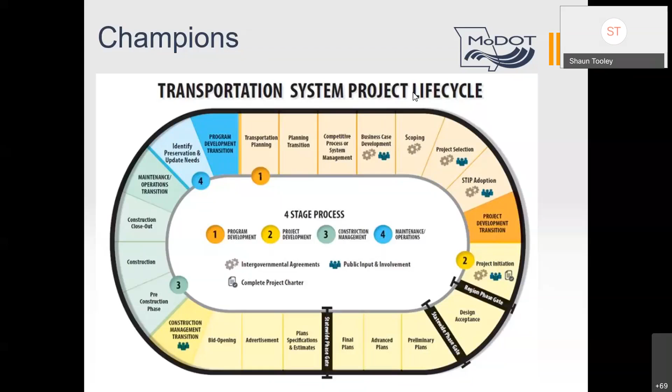In the past, two St. Louis District employees were internal champions for active transportation. Some of you may even know them by name: one, Paul Wojciechowski, is a consultant who has conducted many active transportation studies in the state of Missouri. And the other is Larry Welty, who now works for St. Louis County and has helped launch the Bike Walk Action Plan for St. Louis County that is currently underway. Even though they are former MoDOT employees, their passion for active transportation has continued.

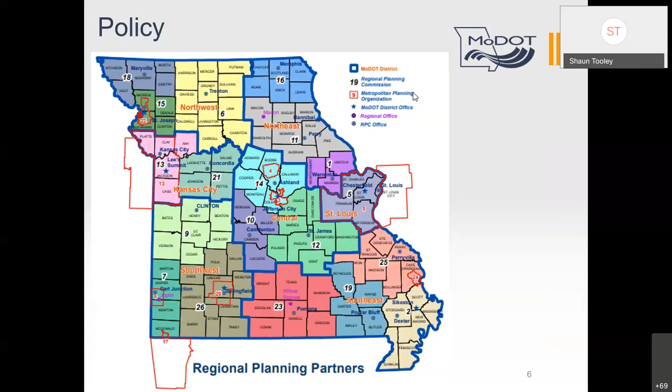Policy: displayed on this slide are our transportation planning partners, metropolitan planning organizations (MPOs) and regional planning commissions (RPCs), who work with MoDOT to develop and apply policy to the state. At the federal level, there have been very influential transportation acts, including the Federal Aid Highway Act of 1956, for which many of us are familiar, which resulted in 41,000 miles of interstate highways. The other, and related to active transportation, is the Intermodal Surface Transportation Efficiency Act of 1991, which emphasized being inclusive of other modes. This act, nicknamed ISTEA, set goals for reducing bicycle and pedestrian fatalities and injuries, and doubling their share of total trip making. These two pieces of legislation have shaped where MoDOT is today.

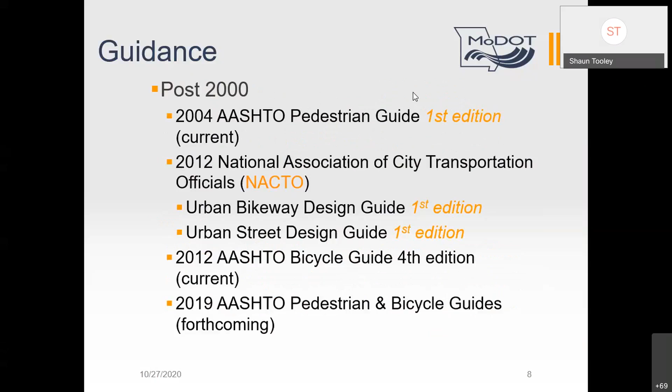On the next slide, you'll note guidance that is post-2000, including the National Association of City Transportation Officials, or NACTO, guide in 2012.

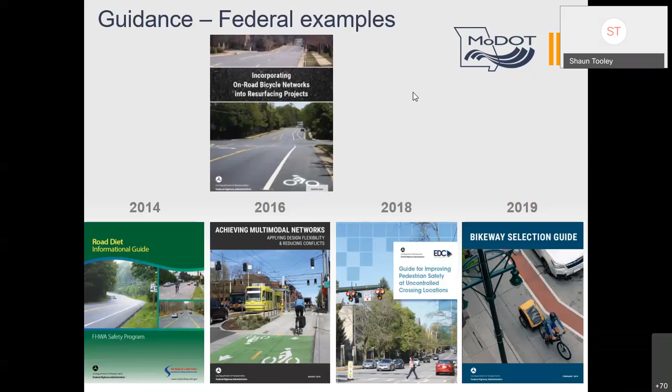On the third slide for guidance, you'll note that quite a bit has happened since NACTO published their guide in 2012, in that the Federal Highway Administration has published additional resources covering topics such as incorporating bike facilities into routine resurfacing projects, achieving multimodal networks, improving pedestrian safety at uncontrolled crossing locations such as mid-block crossings, and most recently, the Bikeway Selection Guide, which solidifies the concept of different types of bicyclists associated with the level of stress rated by bike facility type. As you may note from the years listed, much change has happened since 2012.

Demonstration projects: to put this guidance into practice, Federal Highway has funded example projects with programs many of us are familiar with, such as the Safe Transportation for Every Pedestrian (STEP) and Every Day Counts (EDC). These projects provide states with examples to replicate and have resulted in much of the change to guidance and supporting information published since 2012. More on examples of STEP later in this presentation.

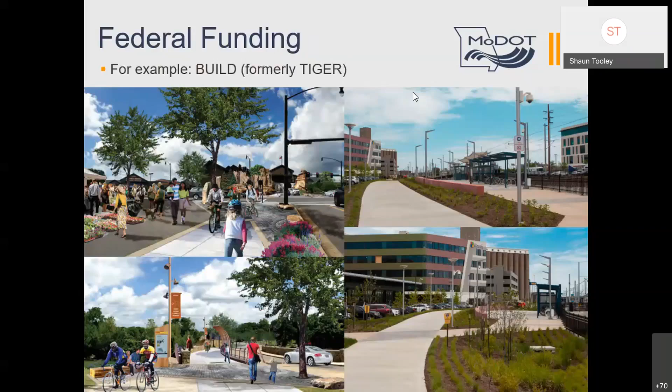On the right, in 2014, a BUILD grant was awarded for the Cortex Metrolink station and first segment of the now renamed Brickline Greenway in central St. Louis City. In 2020, MoDOT applied for an INFRA grant for I-270 in northern St. Louis County, which included extending shared use paths along the outer road by 3 miles to connect to the North Riverfront Trail with Great Rivers Greenway.

Although the grant was not awarded, the inclusion of bicycle and pedestrian facilities demonstrates the growing importance of active transportation to the Missouri Department of Transportation.

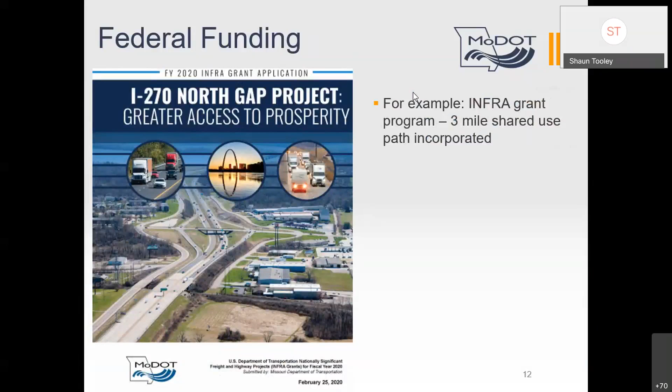Implementation: MPOs and RPCs, as referenced earlier, are partners with MoDOT in transportation planning decisions, and they commit their resources to active transportation. Through vision setting and planning activities, such as the Regional Long-Range Transportation Plan, policies, and area-specific plans, MPOs and RPCs can influence the inclusion of active transportation projects on the MoDOT system in their respective areas. There is more on this later in the section on MoDOT as a stakeholder.

However, there are challenges. MoDOT has encountered challenges to bicycle and pedestrian inclusion, such as what standard to apply. As many of you may know, MoDOT follows AASHTO guidance, whereas cities and counties are more flexible when using NACTO guidance. Other examples of influencing factors include right-of-way and environmental impacts, among many others. These challenges result in trade-offs and balancing priorities and commitments—and I can't emphasize this part enough, again, about trade-offs and balancing those priorities and commitments.

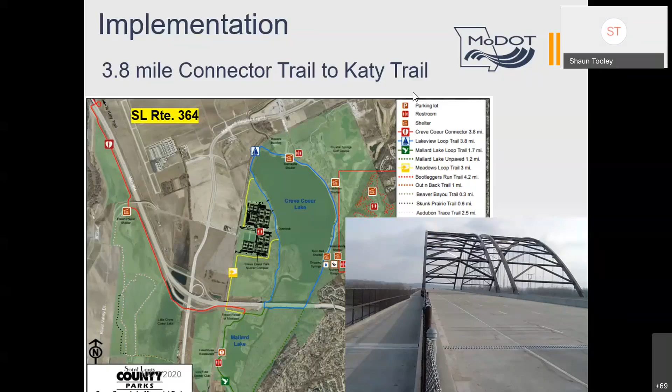In summary, for background information, what influences MoDOT's roles and decisions in active transportation is related directly to its responsibilities and focus, the role of its leaders, the pursuit by internal champions, the expectations set by policies, the flexibility of guidance, learning from demonstration projects, how much funding is available, addressing project-specific challenges, and working towards implementation, especially in partnership with other governments.

Next, I will share with you MoDOT as a builder. And this is fun because we get to see pictures.

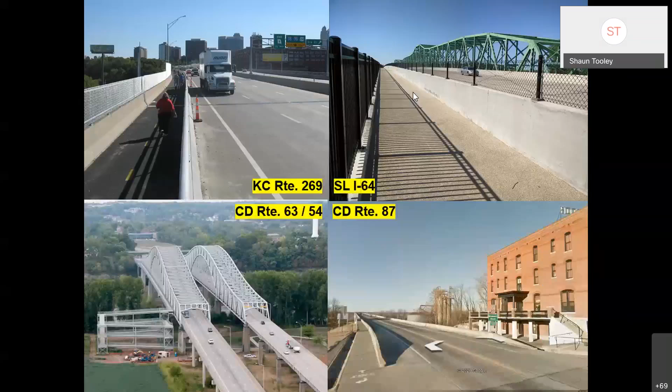Since 2000, more than 8 major river bridges, defined as at least 1,000 feet in length, across the Missouri River have been rebuilt or retrofitted. 3 additional major river bridges are currently being retrofitted or rebuilt. Let's take a look at them.

Pictured at top left is the Chouteau Bridge carrying Route 269 in the Kansas City district. Pictured at top right is the Daniel Boone Bridge carrying Interstate 64 in the St. Louis area. Pictured bottom left is the Jefferson City Bridge carrying Routes 63 and 54 in the Central District. By the way, this one was a retrofit. Pictured at bottom right is the Boone's Lick Bridge carrying Route 87 in Boonville in the Central District. This bridge now carries the Katy Trail over the Missouri River too.

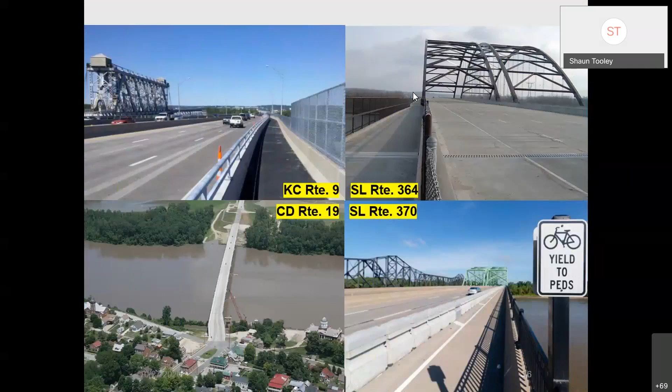Pictured at top left is the Heart of America Bridge carrying Route 9 in the Kansas City area. Pictured at top right is the Veterans Memorial Bridge carrying Route 364 in the St. Louis area. Pictured at bottom left is the Christopher S. Bond Bridge in Hermann carrying Route 19 in the Central District. Pictured at bottom right is the Discovery Bridge carrying Route 370 in the St. Louis area. Also about this bridge, a local government successfully attracted federal funds to retrofit the bridge with movable barriers recently, which added a bicycle and pedestrian facility where bicyclists were already using the shoulder.

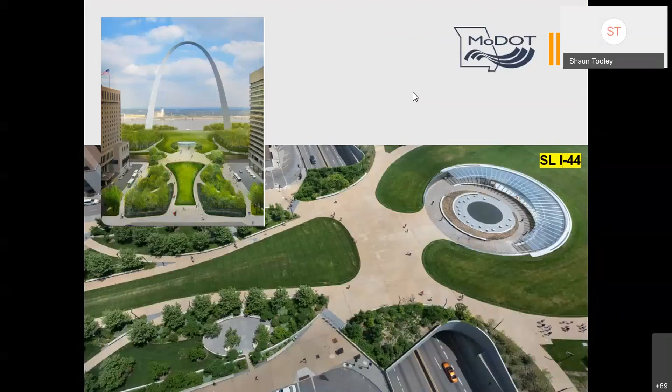Moving on, although not a major river bridge, MoDOT rebuilt bridges and a roadway network that separates downtown St. Louis from the Gateway Arch National Park. This now includes a land bridge, otherwise known as a freeway cap, across Interstate 44 to allow for uninterrupted movement on foot, pedal, scooter, and other non-vehicular modes. This project was also built with a BUILD grant.

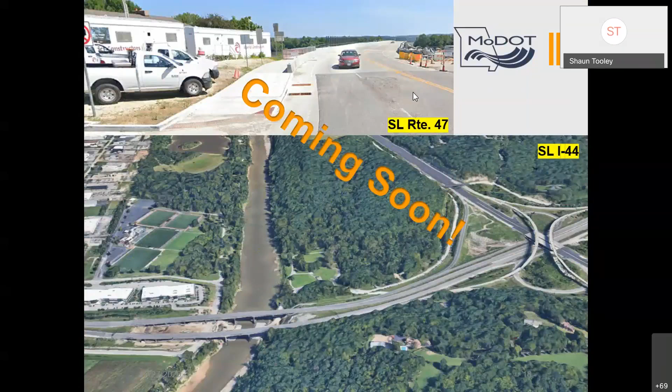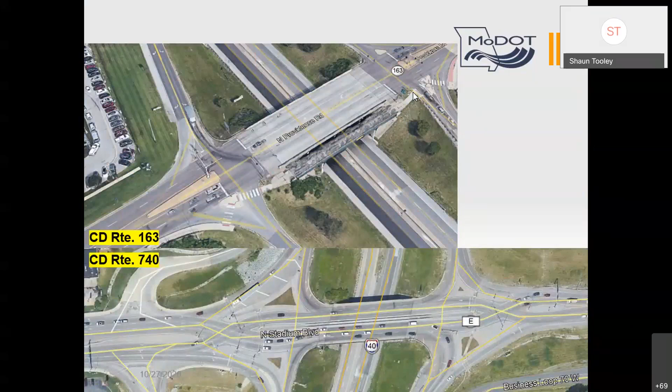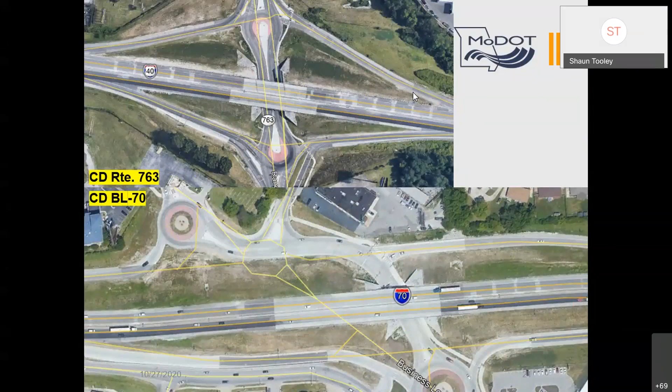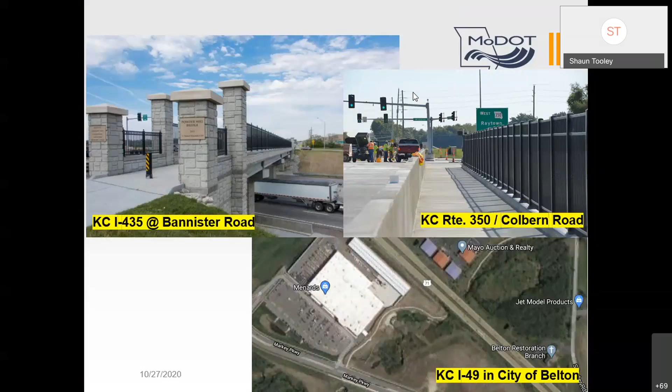This next slide features the Kansas City area, where MoDOT has partnered with local governments to build a tunnel under Interstate 49 in the city of Belton, which is pictured at bottom right. Pictured at top left is a bike and pedestrian bridge over Interstate 435 at Bannister Road. Pictured at top right is the Colbern Road Bridge over Interstate 470 near the district office. Not pictured is the Fairfax Bridge carrying US 69 over the Missouri River, which was completed with a multi-use path.

Let's shift gears to arterial corridors. Since 2000, MoDOT has worked with local governments on repurposing roadways to accommodate active transportation or add new facilities. Examples include road diets, traffic calming, adding sidewalks, adding bike lanes, adding unsignalized mid-block crossings, and implementing other pedestrian safety countermeasures.

One recently implemented project added a total of 14 rectangular rapid flashing beacons at mid-block crossings on Route D, Page, northern St. Louis City, and Route 100, Manchester, also known as Chouteau, in central St. Louis City.

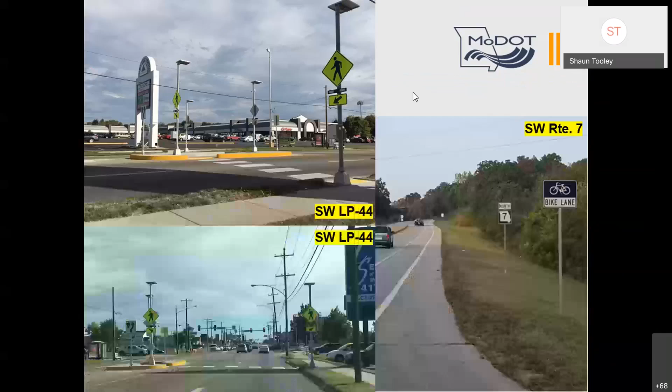Now moving to the Southwest District, starting with the Springfield area. Pictured at top and bottom left is a rectangular rapid flashing beacon that was added on Loop 44, Business 65, locally known as Glenstone Avenue. Pictured at bottom right, bike lanes were added to Route 7 in Warsaw from Truman Dam Road to Route 65.

In the future, the Buck O'Neil Bridge is anticipated to also have an active transportation facility too. On this slide is an artist's rendering of what the facility may become, such as a green cycle track.

The rebuilt roadway and bridge extends from the River Market neighborhood north of the Central Business District and connects north to the downtown airport. This neighborhood was recently designated as a great place by the Missouri chapter of the American Planning Association and was a 2020 grant recipient for extending the Kansas City streetcar into the neighborhood.

Further north, but not by far, is a recently completed road diet project on Armour Boulevard in North Kansas City, which may be a contender for Great Place designation in the future.

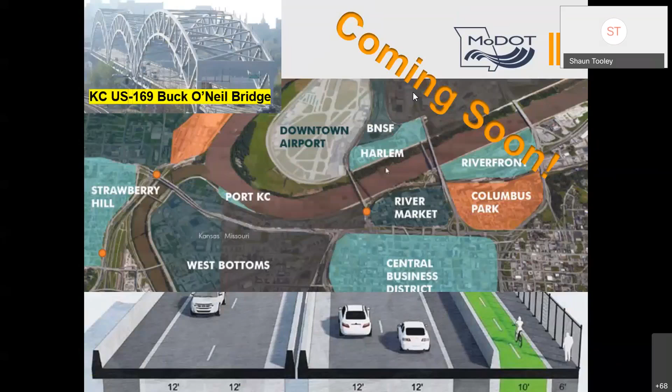The point of the discussion for this in Kansas City is that this bridge will be a connector between neighborhoods that are redeveloping and have more bike and pedestrian users coming soon.

Also coming soon will be over 10 miles of shared use path being added in northern St. Louis County along Interstate 270. This is part of a larger reconstruction project and will include several wider crossings on bridges to better accommodate walkers and cyclists on new bridges.

In summary, active transportation projects have been built by MoDOT, by others, and in partnership with others on the state system, and they can happen in the future.

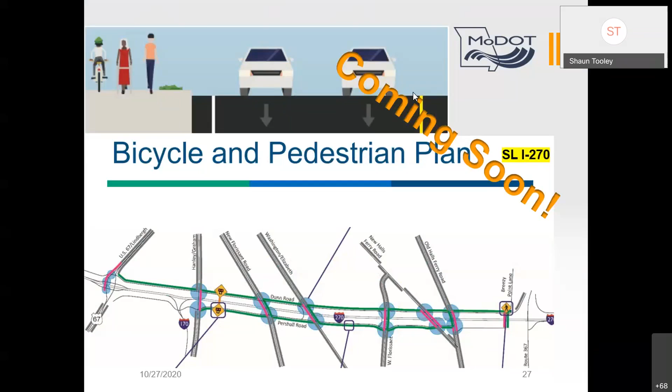So let's explore MoDOT as a property owner. As a property owner, MoDOT is able to partner with organizations who want to make use of MoDOT right-of-way for adding active transportation facilities. To do so requires a variety of legal agreements.

Often the agreement is needed associated with the funding source, whether it is a Transportation Alternative Program, TAP, Surface Transportation Program, STPS, Congestion Mitigation and Air Quality, CMAQ, or MoDOT's funding opportunities through cost share or cost apportionment.

Another agreement may be needed for how bicycle and pedestrian facilities interact with MoDOT right-of-way, whether they are a trail license agreement, a sidewalk maintenance agreement, or an airspace agreement.

Pictured at top left is Route AC in the Northwest District, where a shared use path has been added in eastern St. Joseph, Missouri, through a trail license agreement. Pictured at very top right is Route H in the Southeast District in Farmington, where a rectangular rapid flashing beacon was added in a residential area. This involved a TAP funding agreement.

Pictured at top right and bottom right is Route 163 in Columbia, where an unsignalized mid-block crossing is being added in the future to provide a safe crossing for students accessing Hickman High School from residential areas on the west. This involved a sidewalk maintenance agreement.

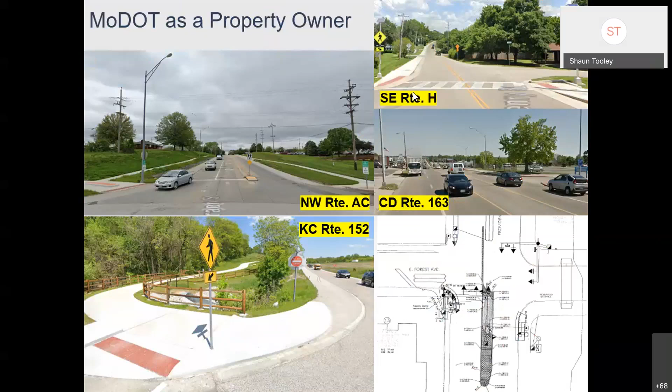Pictured at bottom left is Route 152 in Kansas City area, where a shared use path was added within the highway right-of-way in a new suburban area. This also involved a sidewalk maintenance agreement.

On the next slide, pictured at top left is a shared use path that was added within the highway right-of-way recently along Interstate 55, which connects the River des Peres Greenway in St. Louis City to the Grants Trail Gravois Greenway in southern St. Louis County. Also built by Great Rivers Greenway is pictured at bottom right, the Centennial Greenway crossing over a series of bridges within highway right-of-way in St. Charles County for routes 364 and 94, where the two roadways converge.

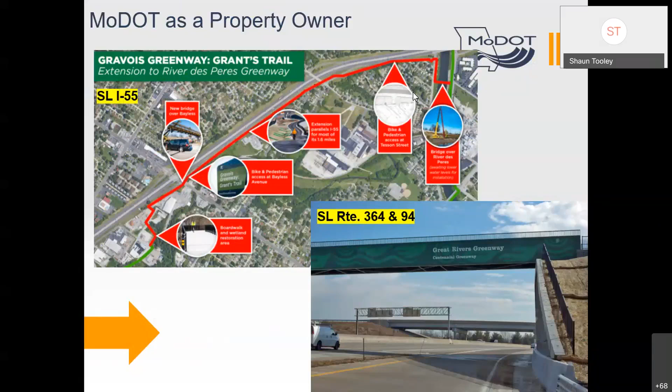The takeaway from MoDOT as a property owner is that active transportation facilities have been implemented and can be implemented on MoDOT right-of-way where feasible and practical.

MoDOT as a stakeholder. MoDOT is a participant in local, county, and regional committees and plans for active transportation. Some are policy focused, such as an advisory committee to a metropolitan planning organization, whether it's East West Gateway, Mid-America Regional Council, or Ozarks Transportation Organization in Springfield.

MoDOT works with local organizations towards implementation, such as cities, counties, and off-street bike facility organizations. For cities, this includes the city of St. Louis and the city of Springfield. For counties, think St. Louis County and McDonald County. And for off-street organizations, think Ozark Greenways and Great Rivers Greenways.

MoDOT is represented by planners or district planning managers focused on policy, planning, and process, or by area engineers and traffic engineers focused more on the details associated with implementation of those facilities, where they might encounter environmental, maintenance, right-of-way, or construction constraints. So let's take a look at some of those plans.

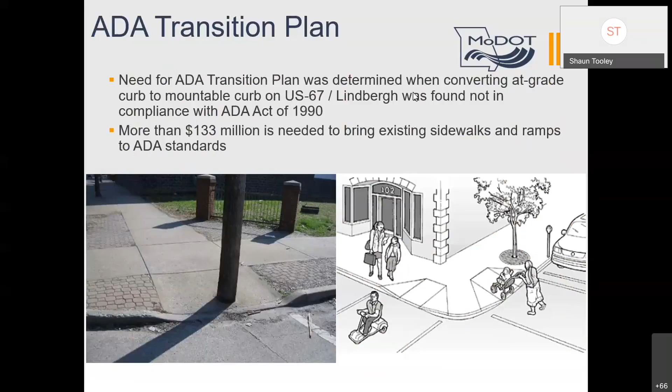Since 2008, MoDOT has invested nearly $68.5 million towards the completion of the transition plan. The districts have projected to invest over $133 million toward the remainder of the ADA facility improvements over the next 5 years in the STIP, the Statewide Transportation Improvement Program.

Also, STEP workshops. Returning back to the discussion of STEP. In recent years, MoDOT has hosted several Safe Transportation for Every Pedestrian STEP workshops. We were doing about 2 per year prior to the COVID pandemic. Local agencies like metropolitan organizations have also held workshops.

East West Gateway hosted a workshop in spring 2019. The Mid-America Regional Council in Kansas City is planning to host STEP workshops in the future if they haven't happened already. Learn more about the Spectacular 7 displayed on this screen at those workshops. I really do encourage us at Team MoDOT to participate.

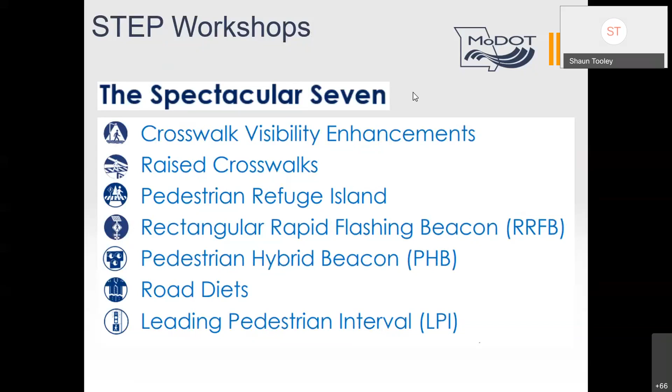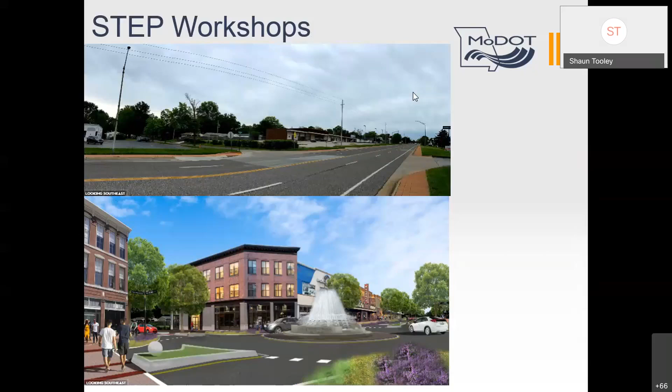This MoDOT roadway is now advancing further in design towards a proposal that can compete for funding and transform Woodson Road to be a safer one and usable for all ages and abilities. Personally, I think this is an exemplar of the STEP workshop, and the municipality turned the workshop into a firm proposal on its way to becoming a reality.

Lastly, countermeasure tool. Pedestrians are vulnerable roadway users in our focus area of the Missouri Strategic Highway Safety Plan. Missouri experiences approximately 100 pedestrian fatalities each year. About 2/3 occur on the state system and 1/3 on the local system.

MoDOT is working with local stakeholders to develop guidance for deploying pedestrian countermeasures systemically, known as MoSCIPs, Missouri Systemic Countermeasures to Improve Pedestrian Safety. This effort builds upon the findings from Federal Highway's Guide for Improving Pedestrian Safety at Uncontrolled Crossing Locations, which came out a few years ago, by incorporating intersections and pedestrian crash risk.

This effort will produce a tool that can be used to assess potential value, lives saved, serious injuries reduced, by deploying a pedestrian countermeasure systemically based on risk factors. Risk factors used in this evaluation will be derived from data currently available or obtained with minimal effort.

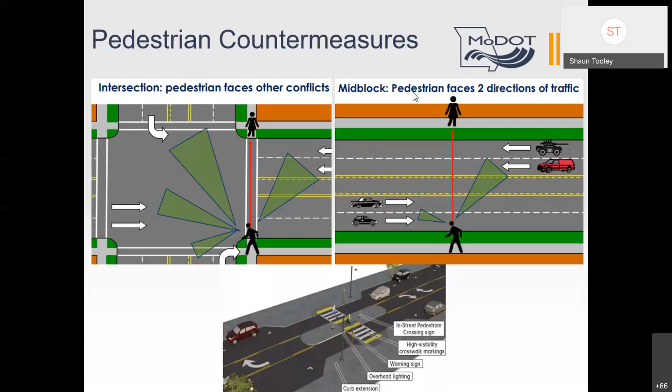Also happening is that the Missouri Local Technical Assistance Program, LTAP, recently hired a safety circuit rider who serves as a liaison to assist with local road safety measures, including pedestrian safety improvements.

Through the ADA Transition Plan, sponsoring STEP workshops, and through the development of the pedestrian countermeasures and LTAP assistance, the Missouri Department of Transportation is working towards the future of active transportation.

To summarize, in this presentation, I have shared an overview of MoDOT's roles in active transportation with background information that shapes and refines the agency's participation. Examples of projects that have been built by the agency in partnership with others or by others on the state system.

Those 5 P's are: P for perspective, which includes advocacy, education, and understanding. Some would say this is the most important because it sets or resets the values of individuals that helps or hinders collective action. P for planning, which is focused on policy, process, studies, and conducting analysis on the front end,

before projects are fully scoped and fully developed. P for political support, which is fostering ownership and buy-in that leads to support from people in positions of decision-making authority. P for practice, training such as through the STEP workshops, experience as demonstrated with the list of example projects,

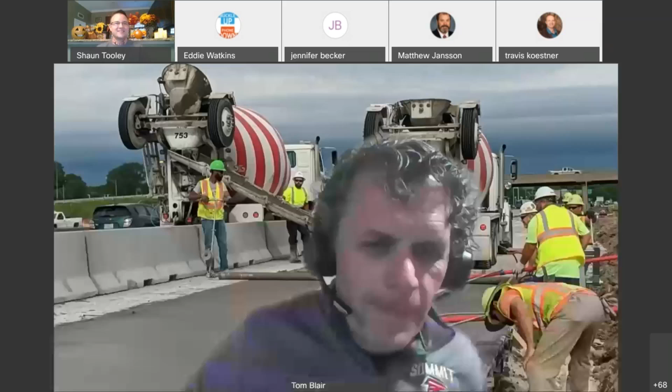All right, I'll turn to Denise. Hey, Shaun. Yeah, go ahead. Go ahead. This is Eddie, Tom. So I had a question about the area team and how we're coming up with frameworks to address a lot of this multimodal and road diets as it relates to arterial management. So I just wanted to see if you can talk about that and what the St. Louis team is looking at to do as being a partner with other agencies and to move forward with addressing the multimodal concerns.

Right. So on one aspect in this presentation, we MoDOT are involved in committees at the regional, municipal, and county levels.

On the other end, I think you're asking about our arterial initiative. Is that correct? I see Tom nodding his head. Alright, for that one, I'll keep it brief.

Over the last two years, MoDOT St. Louis has been working with East West Gateway, our metropolitan planning organization in the St. Louis area, to develop a scope for a study to address a process and flexible design standards for arterial roadways. I see Michelle's joined. It involved a quick action team with Michelle when she was area engineer, traffic engineers, maintenance engineers, and design engineer Jeff Buller. That group refined the scope and helped us build consensus.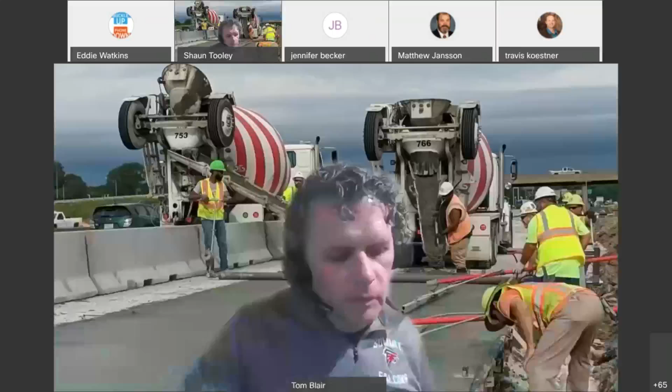In general, yes, you said it right. What I believe Shaun's trying to do is get us to have a plan instead of react. Right now we're reacting to opportunities presented by projects, or reacting to the absolute requirement to update ADA standards, or reacting to partners like a private developer or Great Rivers Greenway that bring opportunities to our table. But we don't really have an active transportation management plan, and so we don't have a way to tell some of our partners that something doesn't fit the regional plan we've adopted. So we're doing it block by block instead of even county by county.

The goal is not necessarily to plan every single roadway, but to create a process to follow, similar to our systematic development informed consent, so we have something to fall back on that demonstrates we've been responsible and are communicating with our local governments and the public through our process.

Shaun, I do have questions coming in the chat, so feel free to enter them if any of you want, or chat directly to me. I got one from someone who doesn't want their name known, but it's a great question: is there any plan for cycling to connect Jefferson County with St. Louis County? Has Jefferson County expressed any interest?

Is our area engineer for Franklin Jefferson on with us today? All right, Stephen, do you think you could take that one, please?

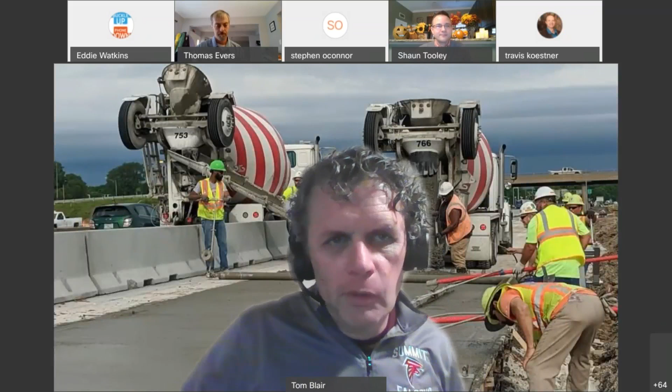Now Shaun, you did highlight in your presentation the many different statewide and regional groups throughout the state that MoDOT actively participates in. I've been in some of those meetings with you and other team members, often communicating what Tom just asked. So we are doing that. We're actively engaged in planning, and we are communicating the reality of our state and federal funds, what they can do and what they can't do.

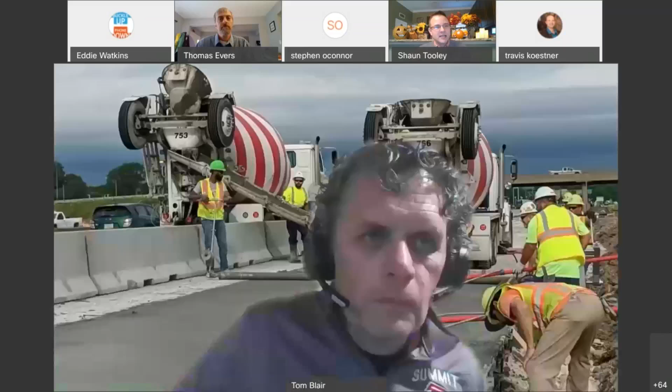So I want to add that currently with the St. Louis County Action Plan for Biking and Walking, which is shifting from high stress to low stress recommendations for bike and ped facilities, that plan is making recommendations for our state system. And there's that expectation of, well, how do we act upon that? With the Gateway Bike Plan, our district engineer, Mr. Haskinger, said we will act upon this. And we've done that, but now the standard is shifting.

And so there's still that focus on how do we work with these local governments on implementation, regardless of where the funds are coming from. Our task is becoming even more so, and that plan won't be alone. GRG funds will also be used to develop lower stress network recommendations for St. Louis City and St. Charles County, which will include MoDOT systems. So this isn't just our story of the past, this is also hopefully to inform and equip us with knowing our story and the tools in our toolbox, as we move forward on implementation with these municipalities, counties, and GRG for the future.

Other questions for Shaun?

Hey Shaun, it's Michelle. You knew I couldn't stay silent too long, but I just want to piggyback on that. I think the area teams and asset management can take opportunities as those projects come into the pipeline to be looking at what's next. I also don't think the Gateway Bike Plan is the end all recommendation, right? The team should be looking at what's next, what are the less stressful facilities, and working with partners, taking those opportunities to make sure we've got the best experience out there for those users.

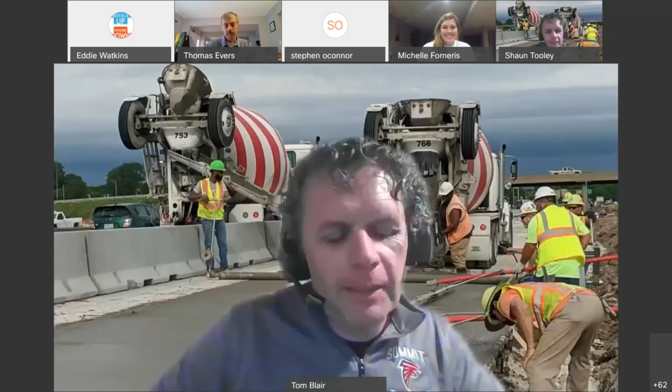Hey Shaun, I'll ask you a question, maybe this will get the crowd stirred up in our final minutes. We'll see. What does our maintenance policy state about maintaining these assets?

Can I punt that one? I don't know, you're pretty knowledgeable. I thought you might know the answer. Does anybody else know? I didn't see Bob and Arissa on here, or too many of our superintendents.

Once we build this beautiful thing, what do we do to maintain it? I should emphasize that's still something that needs to be worked out. In many cases it's worked out individually with cities, counties, and GRG through agreements, and that's an ongoing discussion because this is adding more things to maintain to our system. We still have more to do to figure out that maintenance side - whose responsibility, what are the details, especially when it comes to funding.

Other questions for Shaun?

Michelle Kratzker, you joined us from our multimodal division. Do you have any comments or anything you want to share?

I appreciate the engagement and the concept of making sure active transportation and all modes of transportation are a consideration, not just at the planning stage, but all levels, so we can have an integrated system. Thank you for your work, your leadership, and Shaun, for your passion - it's much appreciated and I think it's making us all better. Thank you for your division's resources to help make this possible. I greatly appreciate it.